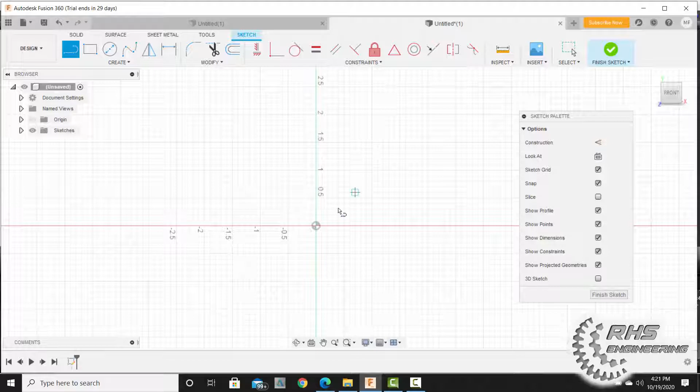Okay, and we're going to grab our line tool. I'm going to zoom in a bit here. And we're just going to start dragging out a line, a horizontal line that is 1.25 inches in length. Okay, I'm going to zoom in. It's a little easier to see. Grab my line tool again. Make a line that's 0.5.

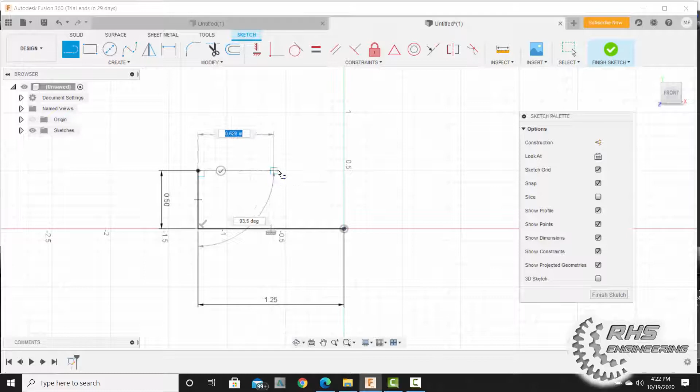Another line here that is 0.75, and then a line straight up that is 0.5, and then a line over here to our Y, our green axis here, and then a line straight down to close our loop. Okay, I'm going to go ahead now and hit escape. Okay, everything looks good. Let me just make sure. I think this guy was 0.5. Yep, and we are good. Let's go ahead and finish our sketch.

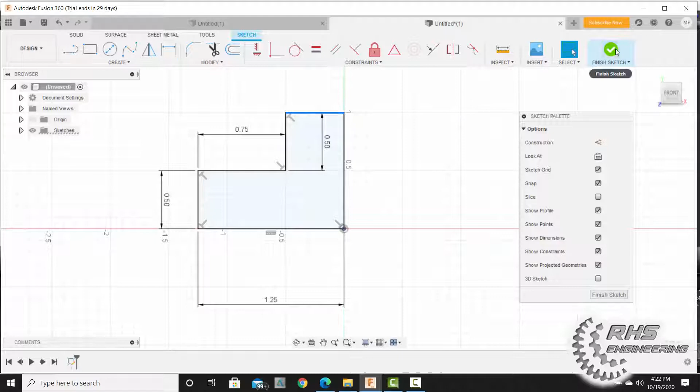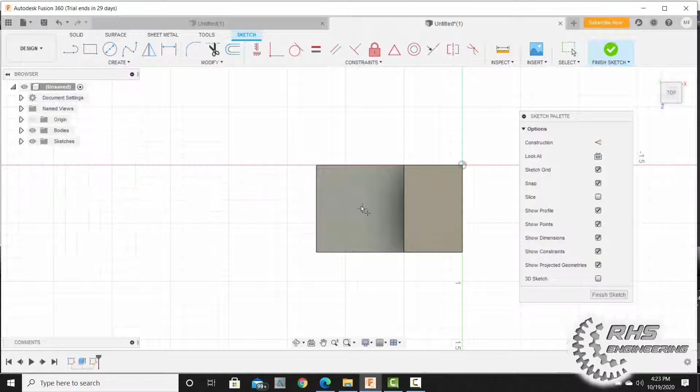Okay, now we are going to extrude out this feature. Okay, a distance of 0.75. Hit OK. All right, and we're going to just add a few features here. So let's go ahead and first, though, create this hole that's supposed to be on here. So we're going to start a sketch right here. And we're going to go to create, and we're going to drop a point right here, somewhere in this vicinity. It doesn't have to be exact.

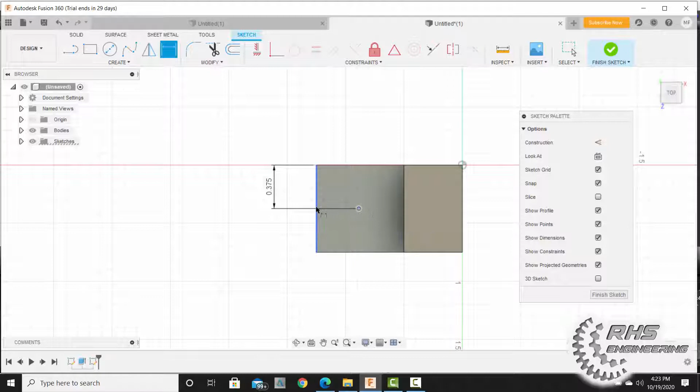I'm going to dimension it, though, and I'm going to just say, let's see here, it was 0.75 divided by 2. Okay, and let's do it the other way too. 0.75 divided by 2. All right, now it's centered basically, right? Okay, so we're going to go ahead and finish our sketch, and we're going to put our hole in there.

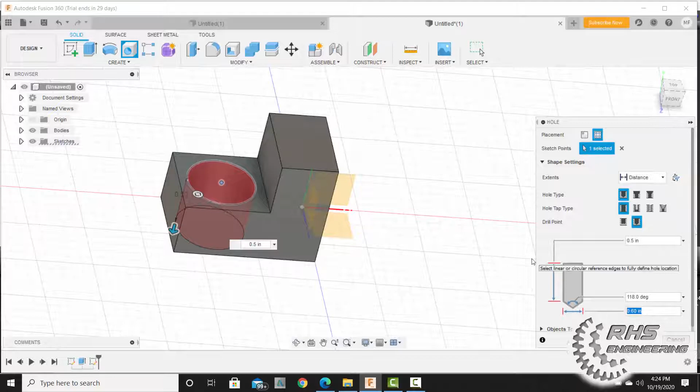And we're just going to click right there, and our hole is going to have a diameter of 0.375. Whoops, I just adjusted the depth. Okay, and let's have it go all the way through here. And I'm sorry, here's where I need to specify the diameter of the hole, 0.375, enter. And we're good. Let's go ahead and hit OK.

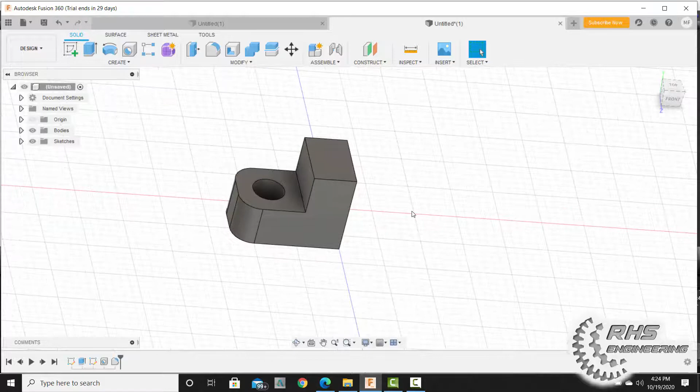Now we're going to add some fillets right here on the corners, and those fillets are going to have a radius of 0.25. Okay, and that looks good. Let's go ahead and hit OK. And now we are ready to mirror. And to mirror it, come on up to create. Let's come on down to mirror again.

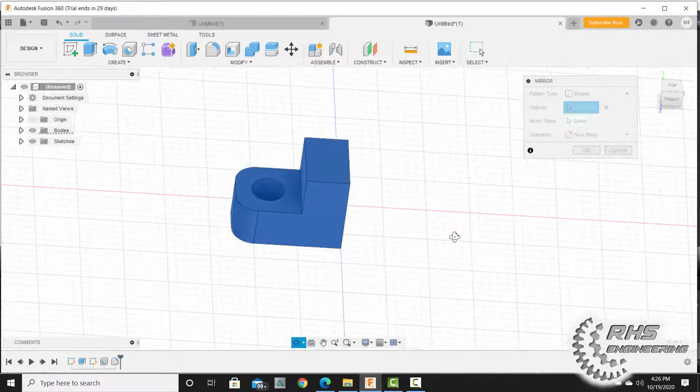Select mirror. Only this time we don't want to select faces. Now we want to select bodies because it's a 3D object. So I'm going to click, and I'm going to just kind of grab it all there, and that selected everything. Okay, I'm going to hover over, and now it's saying, hey, what's the plane you want to mirror it around? So I'm going to click that plane right there, and I'm going to hit OK. And there we have it, a mirrored feature.

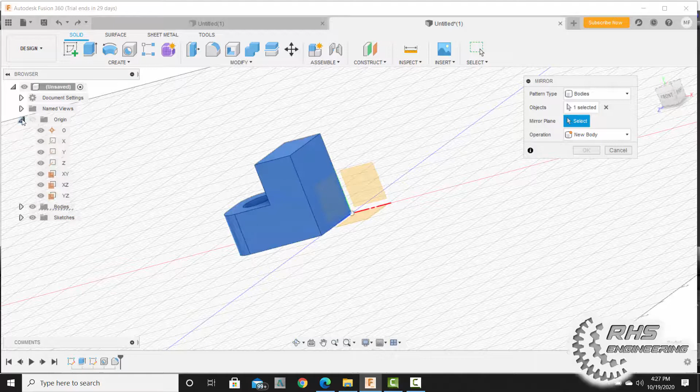All right, but I'm going to show you one other way real quick. Let's go to create, mirror again, bodies. And remember, a lot of the time, instead of just clicking on this face right here for mirror plane, we could have come on over here to our origin and select our YZ plane as well, okay? Remember, these are the three planes that pop up when we always begin designing something, right? All right, so anyways, that's how you mirror a 3D feature or part.